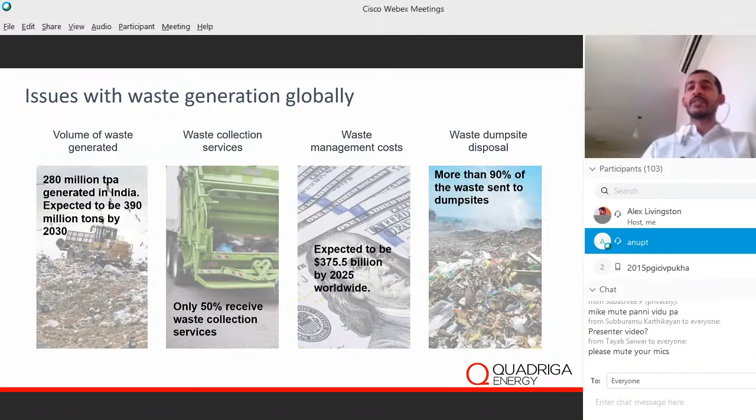My friends asked me, what is the difference between a dump site and a landfill? That's when I realized that you need to also educate the public on what is the difference between a dump site and a landfill, and why it's different.

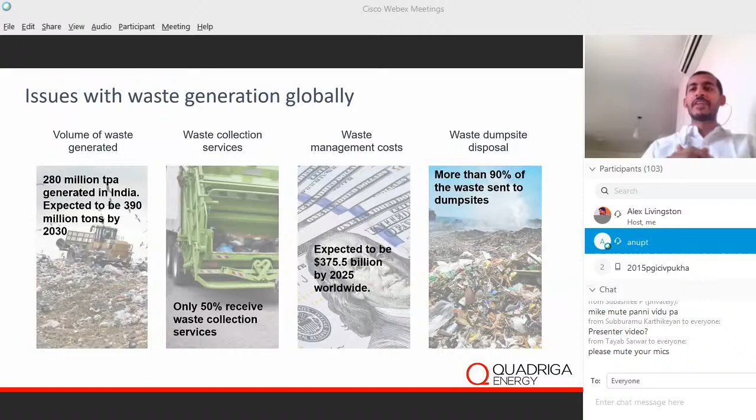It's limited land space, with no trees. Because the space is limited, the whole point of putting it on fire is to utilize the space for more waste, and this has resulted in extreme levels of toxic gases.

People in the nearby neighborhood have been affected, and also these kinds of practices lead to contamination of the groundwater.

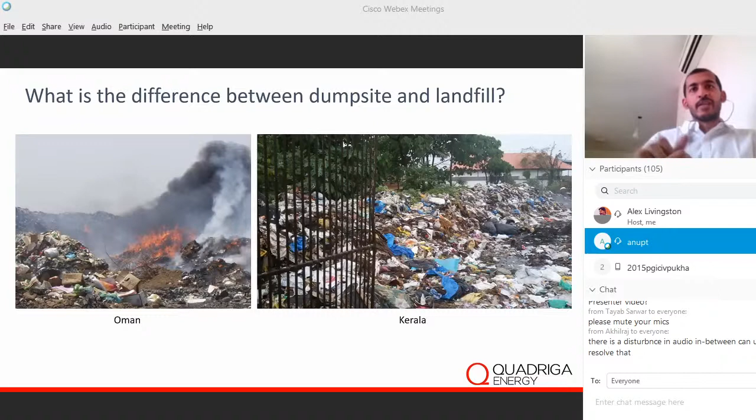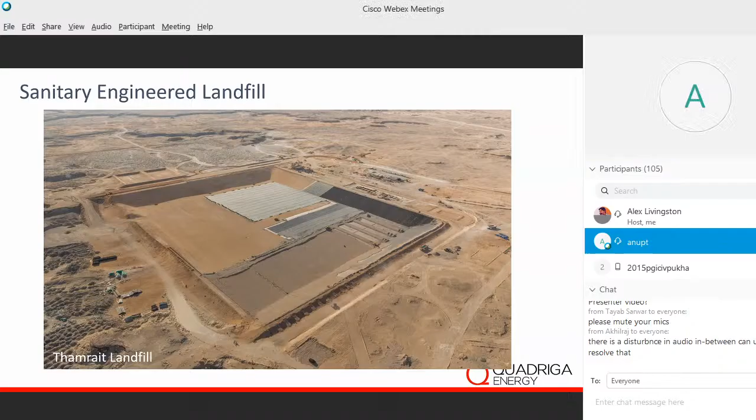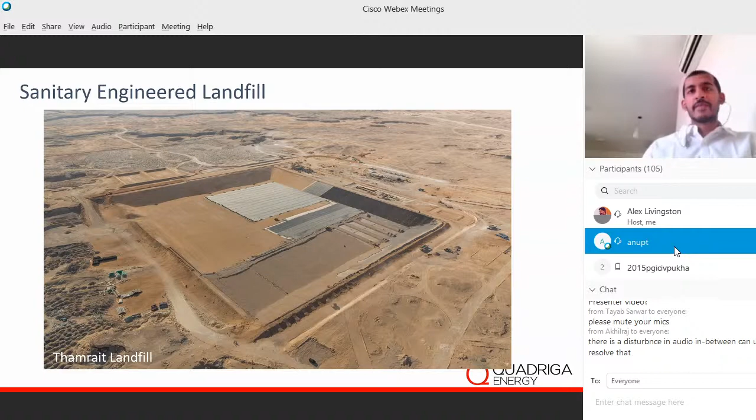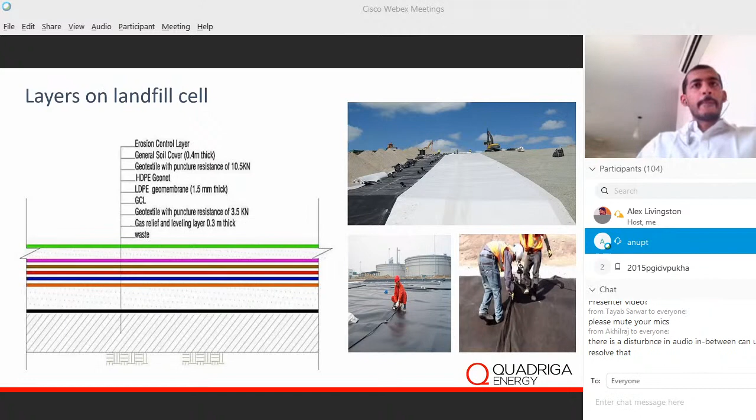So like I mentioned earlier, the landfill gas is majority methane. Methane, as you might know, is a greenhouse gas, and it's 25 times more potent than carbon dioxide. So right now we are discussing climate change and controlling greenhouse gas emissions. So you need to flare it to prevent the contribution of your country towards greenhouse gas reduction potential and commitments. That's one of the reasons why we install these flaring units.

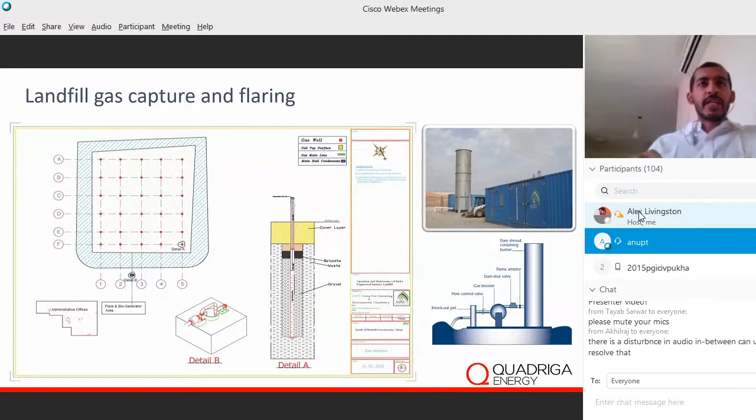So is flaring the only option? Not really. In certain countries, they also try to recover energy from these landfill gases.

But there are still other non-readily degradable waste, like wood or textiles. It disintegrates, but not as fast as food waste. So that starts degrading, and the landfill gas tends to drop with time. So after 40, 50 years, there's no more gas generated from this particular landfill.

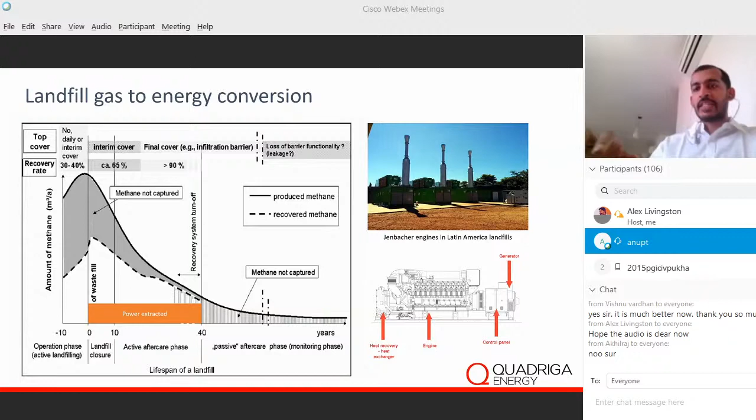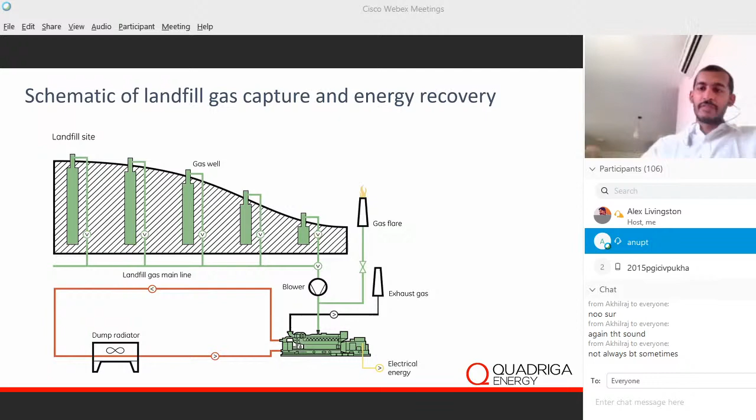So sounds like landfill is a good solution, right? Why can't we all go for it? Not really. Landfill is a long-term liability.

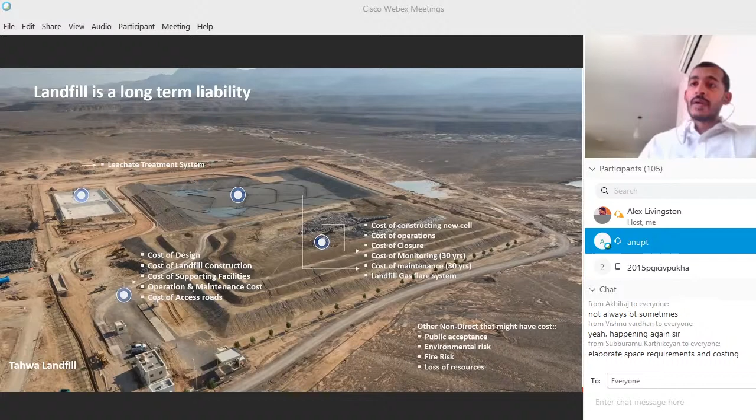And then loss of resources. When you landfill something, you are saying goodbye to that resource. You cannot recover it. So the whole point of us being resource efficient, landfilling is not an option to explore. It is an option to have as a contingency, but that should not be the solution.

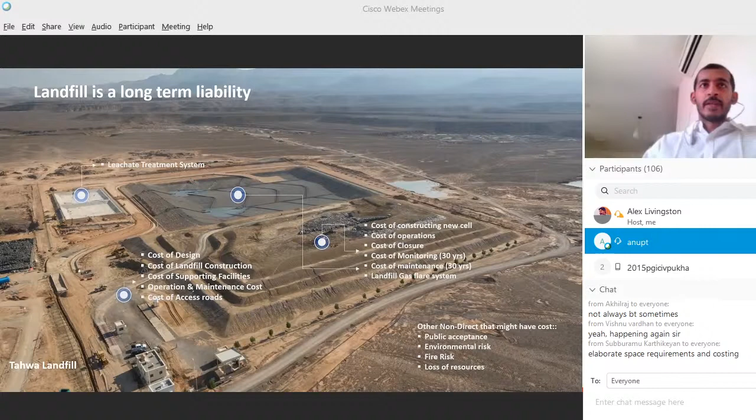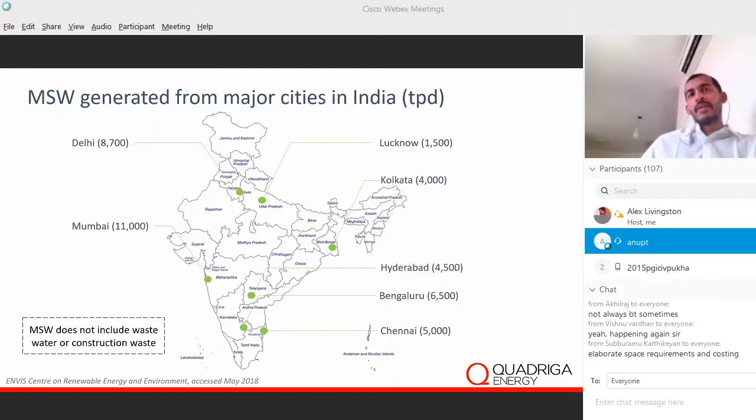All right, so once you understand the volume, what is in this waste? There was a report published by World Bank back in 2012. It's updated again, there's a new version that came out in 2018. It's called 'What a Waste'. It compares the waste composition for different income levels in different types of countries. They did an extensive study, went around all continents, and found out that countries with low or middle income tend to generate more organic waste, whereas countries with very high income tend to generate less organic waste and more recyclable waste. So what is meant by recyclable waste? It's paper, plastic, glass, more packaging waste.

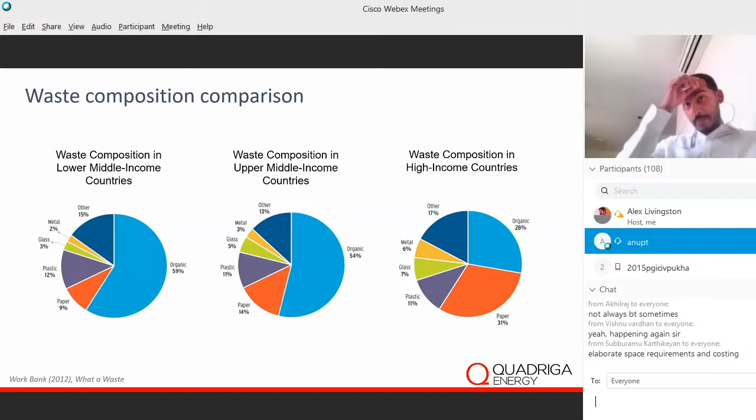This particular scenario says that what I'm trying to get at here is you need to understand your market for developing a solution, so you understand what is the composition.

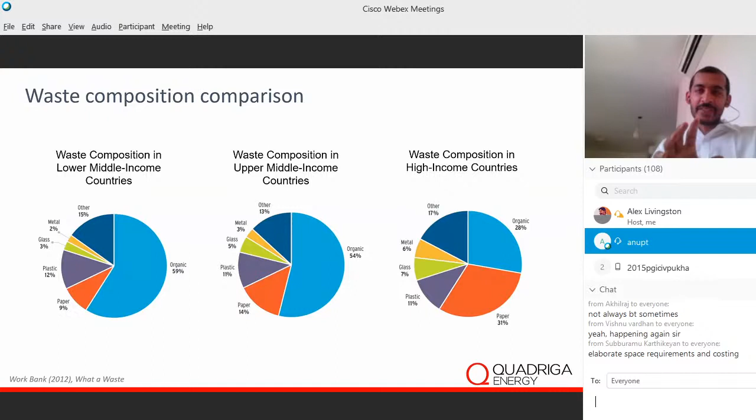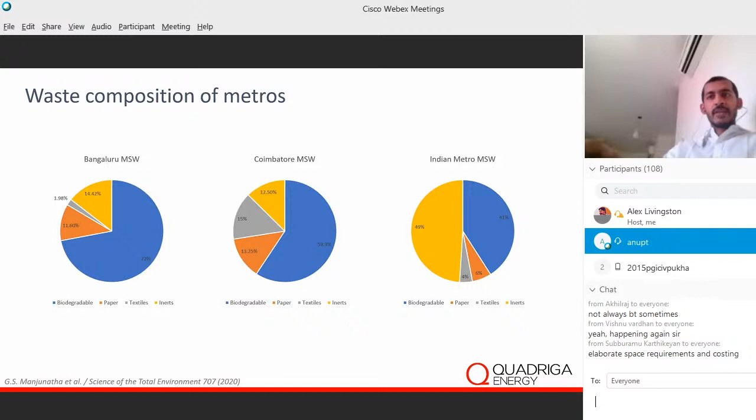So that's for metros, municipalities or corporations. What about panchayats? As you know, in India we have panchayats, we have municipalities, we have corporations. It's all different because the income level is also different across the municipality, the panchayat, and the metros.

I happened to be part of a team that did a study back in 2016 across four panchayats in Kerala. The result again shows that at panchayat level, more than 65% of the waste is organic in nature. It was also helpful for us to understand how much is the recyclable fraction.

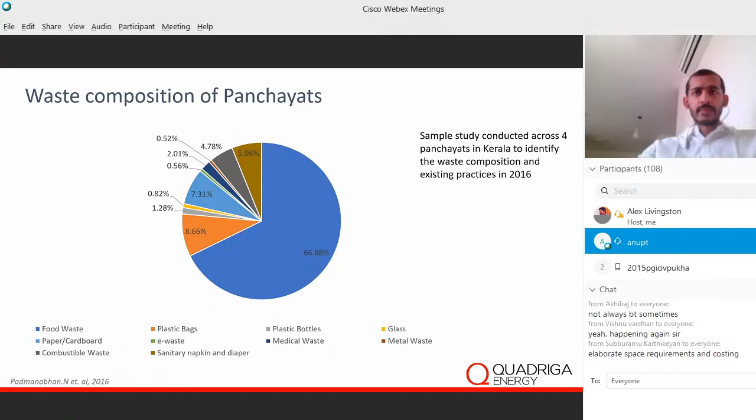Excuse me one second. Right.

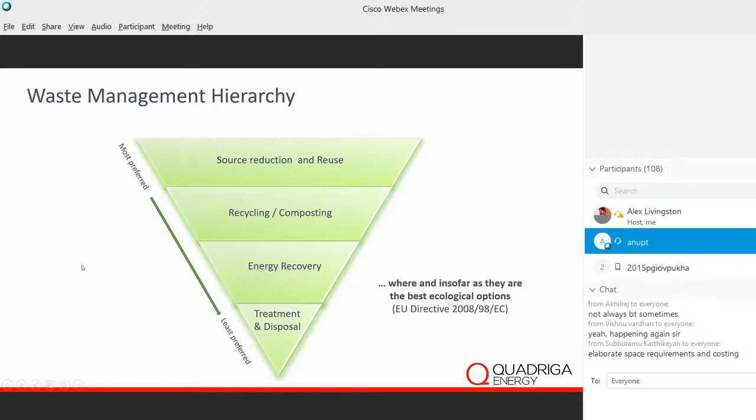So, best method of handling or treating the waste. Some of you might have seen this particular hierarchy. The best option is... okay, so the best method is... I'm really sorry, one second, I'm just getting some disturbance. The best method is not to have the waste in the first place.

The least preferred option is landfilling the waste. You can see there's recycling, there's energy recovery. So there's a lot of options that you can utilize to handle the waste generated.

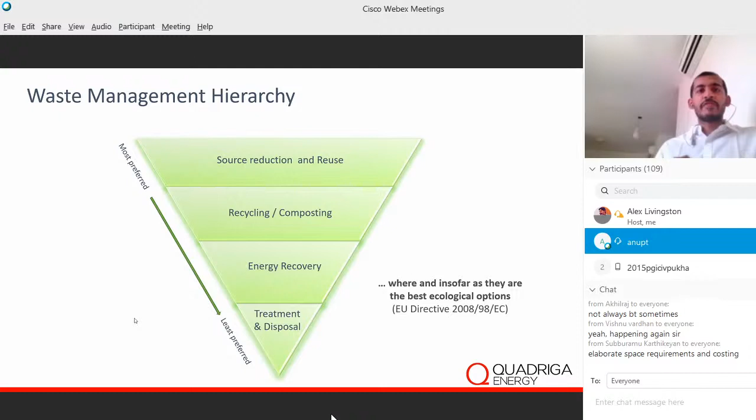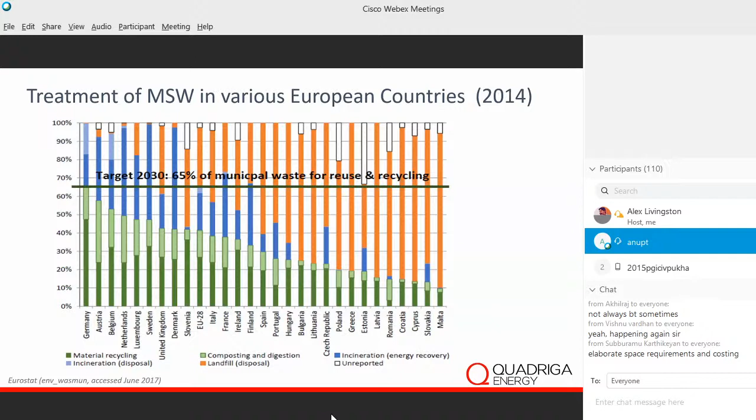But regardless, they have set a target that by 2030, at least 65% of the municipal waste should be reused and recycled. It's 10 years down the line, but still you can see some countries are almost there or making progress in achieving this particular target.

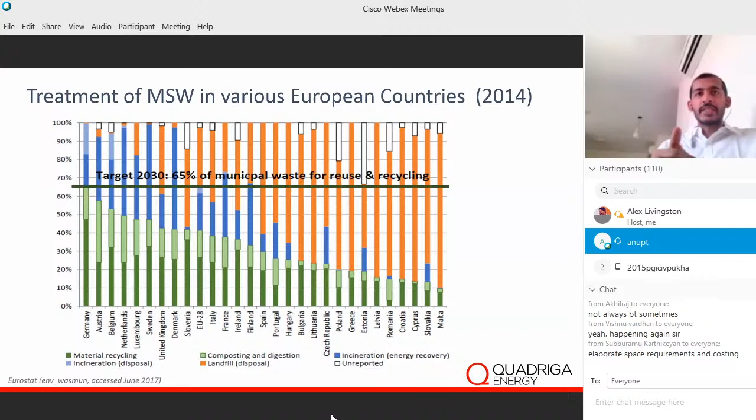So what are the drivers for waste diversion? We talked a lot about waste diversion. Why should the country do this? Mostly it's regulation, regulatory requirement, and the European Union has set a landfill ban, or at least a landfill target to reduce landfilling to up to 10% of municipal waste by 2035.

There's a landfill tax on top of it, where if you send the waste to a landfill, you have to pay a tax to the government. India is also making positive progress towards something similar.

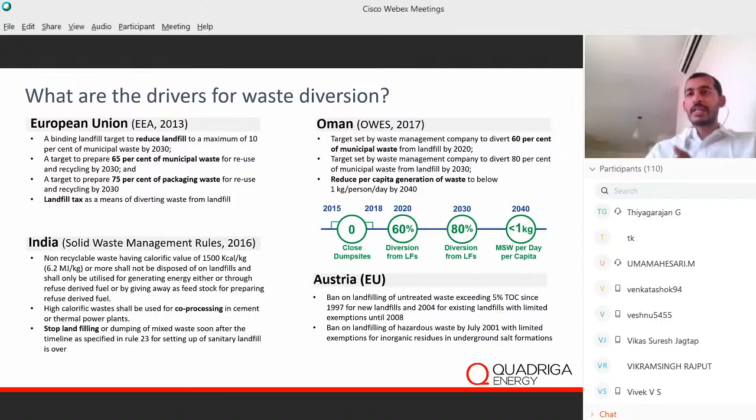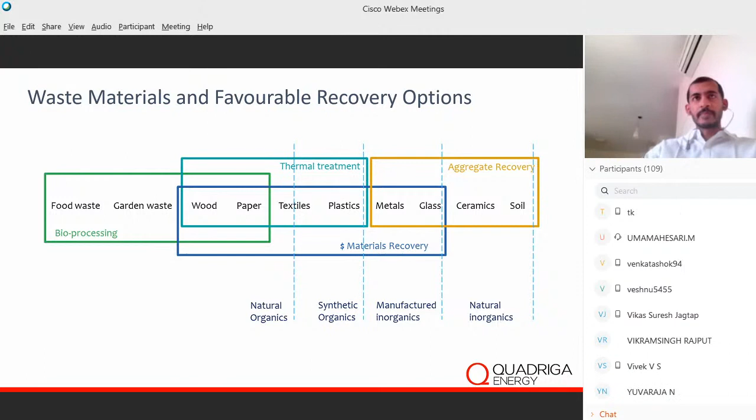So when it comes to economic recovery, disposal is the least preferred option. But what is the truth? The best option for the government, from government's perspective - because I'm working in the government sector, so I understand what costs money and what requires subsidy and what actually can make money.

So reuse is the best option. If you can reuse the waste, then that's the best option for the government. You don't have any investment, so it has the highest positive value because you're not producing any waste. You don't need to collect that waste in the first place. The government doesn't have any cost associated with it.

The second option is source segregation. You might know about multiple bins, and even in Kerala there's a concept of Kudumbashree coming over to your house to source segregate certain types of waste. If you source segregate the waste, the option of recycling it is much higher. There's not much cost associated with it because as soon as you collect the waste separately, you bring it to one depot, source it together, and then transfer it to the recycler. There's not much investment needed in that particular value chain.

If you go to sorting, which is where you mix the waste together, once you mix all the waste together, then there's a cost - you need to sort it. There should be a line of people sitting or standing and sorting the waste into different fractions. Then you need to clean it, then decontaminate it. So that costs money to run such a plant. You need to meet environmental norms, health and safety aspects for the people who work in such a plant, fire safety associated with storage. All that comes into play, so it costs you money.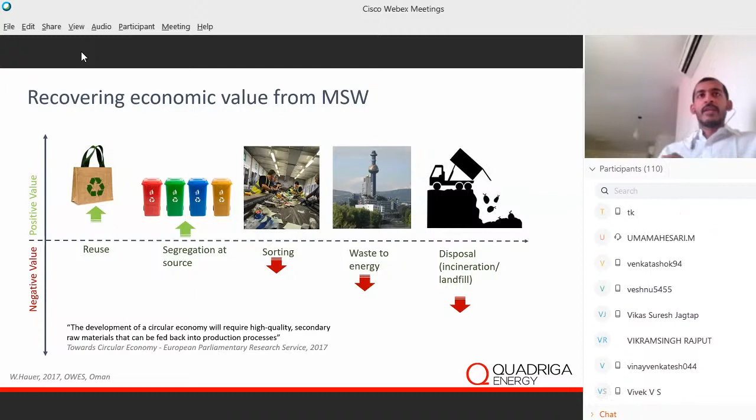So what is the option? What's the solution? The solution is not a straightforward one. It's an integrated solution that you need. I cannot say I need waste to energy and don't need source segregation. I cannot say I need source segregation and recycling but don't need waste to energy. You need an integrated solution.

So obviously the priority is prevention of waste. Second is source segregation - once you segregate, you can rely on mechanical, biological, thermal, and other treatment options that are available. Third is energy recovery. And finally, the byproducts or rejects from the system can be landfilled.

The system needs to depend on the first and second law of thermodynamics. The first law is that energy needs to be balanced. The second, in a funny way, means you cannot unscramble an egg - once it's scrambled, it's scrambled. Also, once you develop a solution, you need to look at the economic decisions, like the long-term cost. If you rely on landfill or dump sites, that's the least cost option.

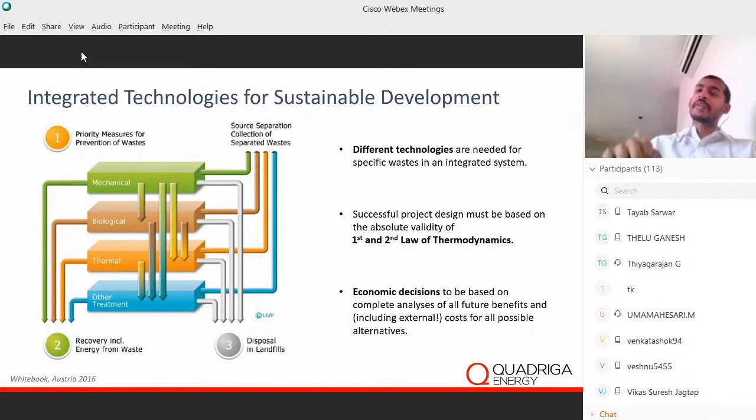There's no cost associated with it. But does it capture the full cost? No, it does not. It does not cover the cost of contaminating groundwater or soil, and it does not account for the cost of causing health damages. So once you account for all the costs, you start looking at a different picture. It's not purely what's the cost right now, it's what's the cost over a period of 20, 25 years.

So let me go into the details of bioprocessing. I've been talking about bioprocessing for some time, so I'll give you an overview of what is meant by it. There are two types of bioprocessing, one very common: anaerobic biodigestion, or digestion, and aerobic digestion.

Anaerobic digestion is when food or other biodegradable waste is treated by microorganisms in the absence of air. Once treated, it generates biogas, which is rich in methane. As you know, methane is a combustible gas. You can combust it using a gas engine, and recover heat and electricity from it. The digestate can be stabilized, dewatered, and sent out as organic compost.

The different stages of biodigestion you can see on the left hand corner: hydrolysis, acidogenesis, acetogenesis, and methanogenesis. Most biogas plants have these four phases, but the order and time of each will differ depending on the technology and system that you use.

Then there is aerobic digestion, which is composting. Unlike the other process, this happens in the presence of oxygen or air. The microorganisms feed on the food and develop soil amendments, which you can again use on the farm to produce food. So it's a circular concept.

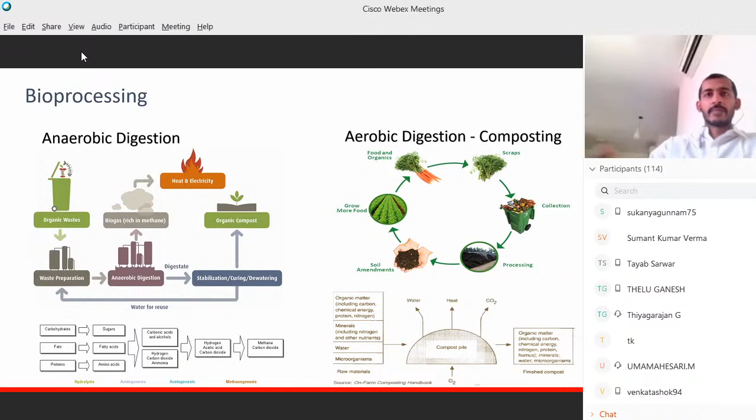This is an example of what a biogas plant looks like. This is something we are developing here in Oman, taking waste from the food and vegetable market and also from a slaughterhouse. We take the waste from these two markets and send it to the biogas plant, which will produce enough electricity. It's co-located next to Sultan Qaboos University, so the waste will generate enough electricity for powering part of the university's requirements.

The university also has a co-located farm and farming community, so they're going to use the digestate there.

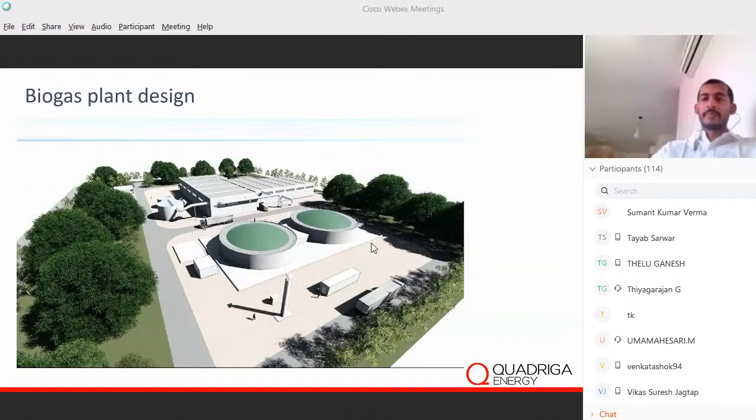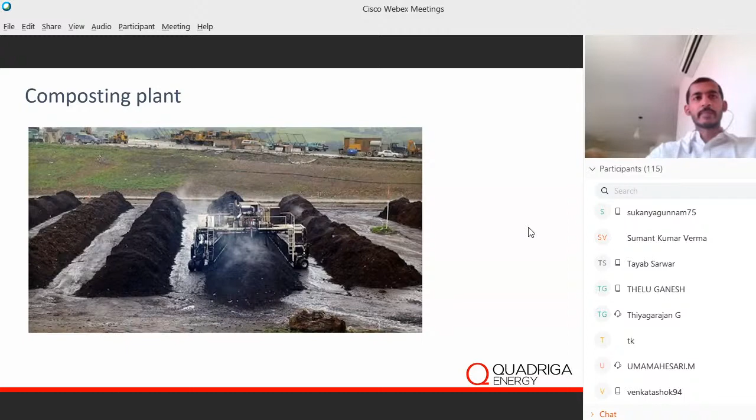Now moving on to thermal treatment. So what is included in thermal treatment? Waste is sent through a thermal treatment process and burned, and the result of burning is you get flue gases, different types of gas, and bottom ash. You also recover from this process useful energy, which you can use for producing steam or for producing electricity.

It's very important to understand the waste composition and its characteristics when you look at the raw material. For example, if the waste is fully organic, fully food waste, there is no point in burning it, because the calorific value of the waste is influenced by its individual components. So when you want to burn waste, the first thing you look for is the calorific value of the waste as a whole, not the individual components. That's why the composition of the waste is very important.

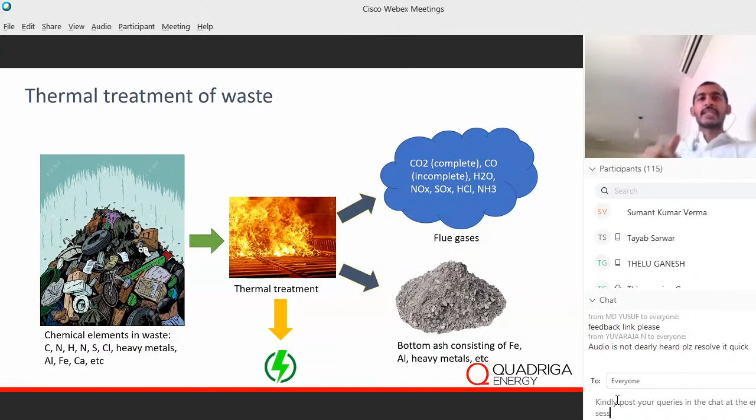Food waste has very low calorific value, so it makes no sense to burn food waste. This goes back to our initial discussion that we need to do source segregation, diverting food waste away from that option. But wood waste, paper, textiles, and plastic tend to have high calorific value. So the higher the percentage of these components in the MSW fraction, the higher the calorific value of the waste, and the more energy you can recover.

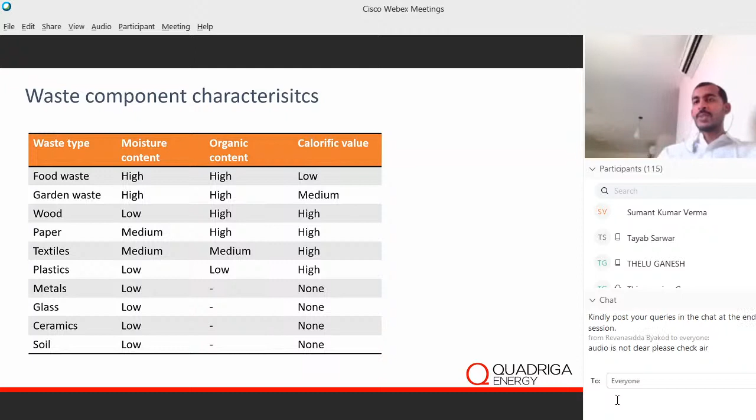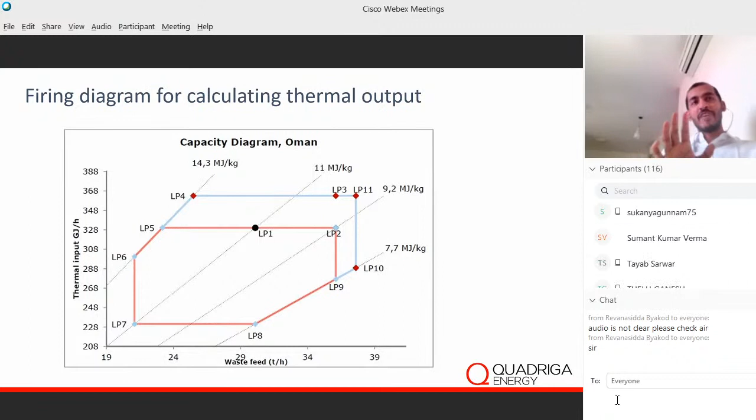So this is a firing diagram. For an engineer developing a waste energy plant, this is very important—it helps you decide the size of the plant based on the calorific value and the energy demand. For example, the government-run electricity grid requires, say, 65 megawatt of additional capacity. Once that is fixed, what you tend to do is work backwards.

So you test, okay, what is the calorific value? The slope lines are the calorific value of the waste. If my calorific value is say 9.2 megajoules per kilogram, which is quite high—but in the Middle East we tend to see more 9.2 and 11 megajoules, while in India it's mostly 7.7 or below because of the moisture content. But anyway, I'll take the example of Middle East: 9.2 megajoules per kilogram.

So now you know the energy, the thermal input, because that's kind of fixed. So what you tend to do is, if the calorific value for the waste is 9.2, how much should be the waste throughput? For example, taking 328 gigajoules per hour, for that particular waste you need to be feeding approximately 36 tons per hour. So this explains the capacity planning of the plant based on the calorific value and the energy demand—all three are interlinked.

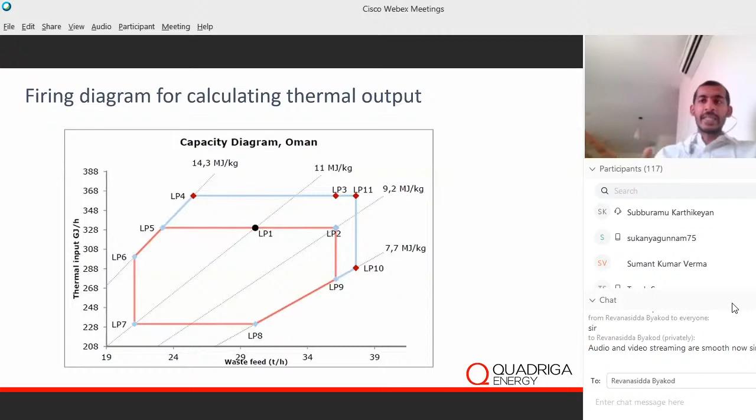So that's a ski slope. They designed a ski slope around the waste energy plant so that the residents of the country, during winter time, can do skiing and have fun next to the waste energy plant. That also tells you how safe the plant is—if they're inviting the public to come and ski next to it, that tells you the plant is designed according to the highest safety standards.

Then there are around 75 units in the US. In Japan, there are around 1,000 units installed already—the reason is the space constraint, since Japan cannot afford to have landfills, so they have more waste to energy plants. China and South Korea have around 120, but it's growing very fast. In India currently we only have 7 installations, but more plants are being studied for development.

Middle East—there is an operating plant in Qatar. Sharjah and Kuwait are right now tendering a plant for construction. In Oman, like I said earlier, we finished the feasibility study and the detailed analysis of 2 plants, now waiting for tender, but because of COVID the tender got postponed to next year.

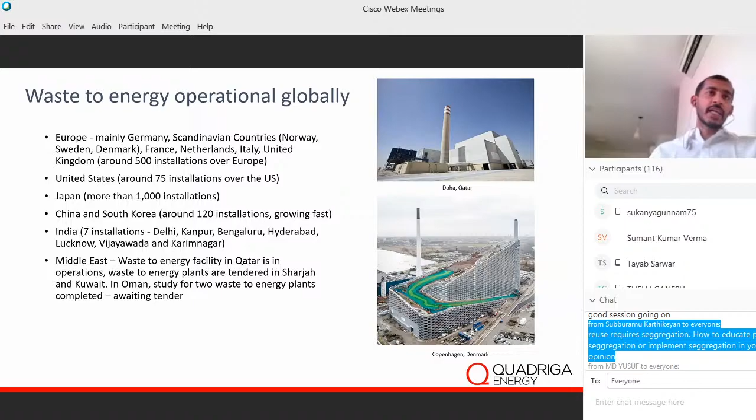But if your municipal solid waste is not pre-treated, the best option is to go with grate. That's why you will see the majority market share across the globe is for grate incineration technology, because in most places they don't do pre-treatment of the waste.

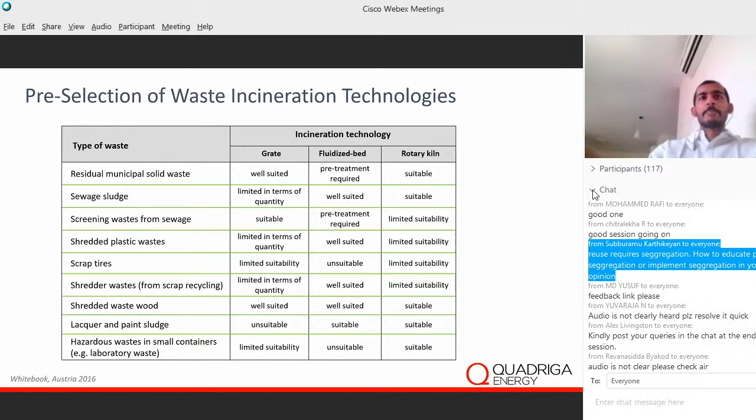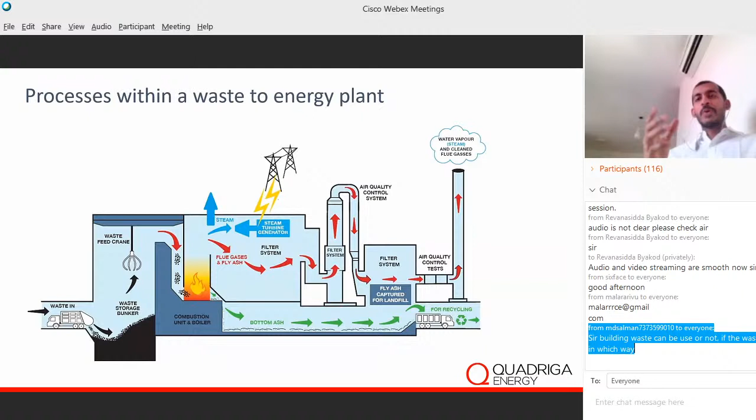The gas that results from the incineration of the waste is treated—it's sent through a filtration system, a proper air quality treatment system, and then it goes through a chimney. The bottom ash from incineration of the waste is collected and sent for recycling or for disposal.

Usually it's also done as a contingency—it's not just-in-time delivery like the Kaizen or Japanese Kaizen philosophy, because there can be natural disasters, or something happens, the truck breaks down. So you cannot have the plant idle for that period of time.

So what you tend to do is you have the bunker capacity for at least 7 days. This is the minimum usually. So it's designed to have an excess capacity of 7 days worth of waste or fuel.

Now we're going to the fuel concept. You need to have sufficient extra capacity. In the event of any disaster, you can rely on the excess from the bunker. Another purpose of having the bunker is if something happens, like suddenly you have 5 trucks coming full of, say,

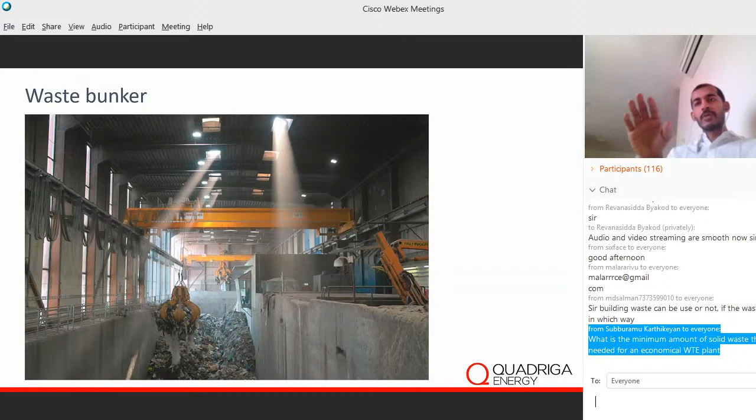paper waste or food waste, for example. So what tends to happen is you cannot feed it directly onto the hopper because, as I mentioned earlier, each waste component has different characteristics. So you need to homogenize the waste before you feed it into the hopper because, like I said, the thermal output depends on the calorific value of the waste and the quantity that you need. So another purpose of having such a bunker is to mix the waste and homogenize it before you load it into the hopper.

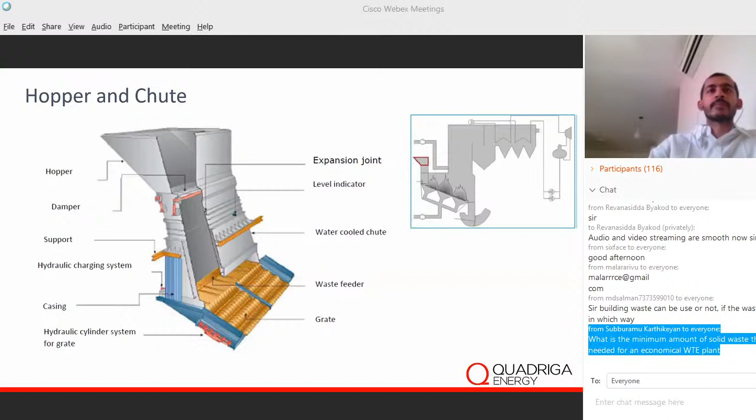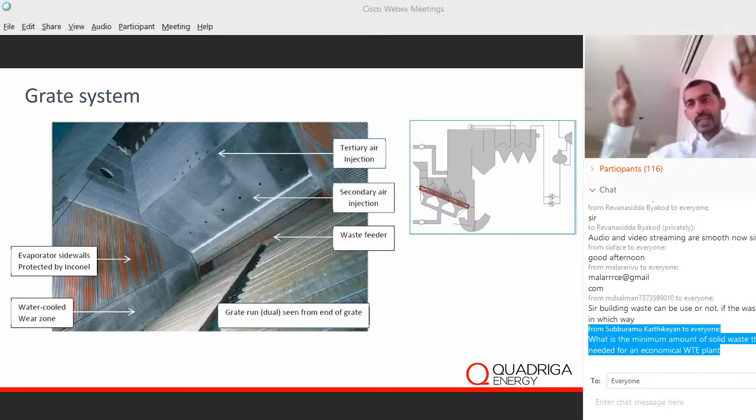So air is very important because if you don't provide sufficient air in the grate, the waste does not burn. So by the time it reaches the bottom, it's not ash, it's actually the waste itself. That's why there are different types of air feeding happening - secondary air injection, tertiary air injection, and the side walls of the grate are also cooled because you don't want it to reach very high temperatures and start clogging the system. So it is a very sophisticated process.

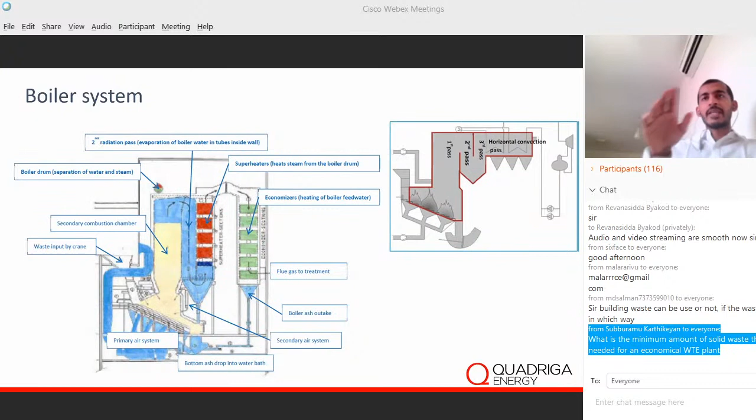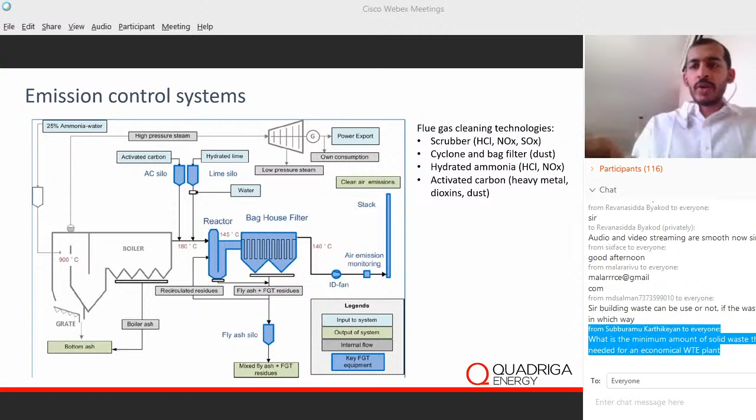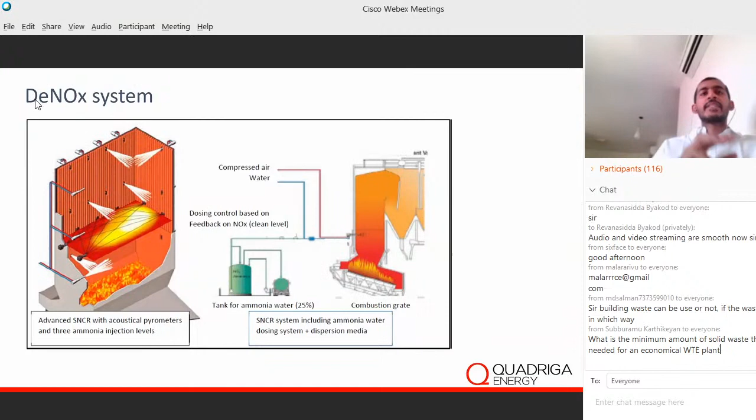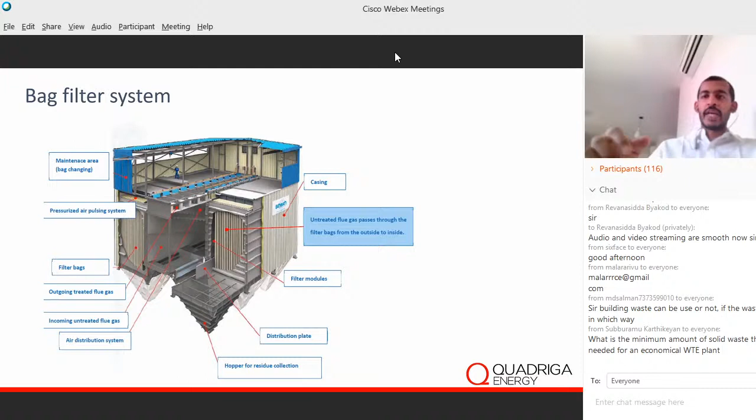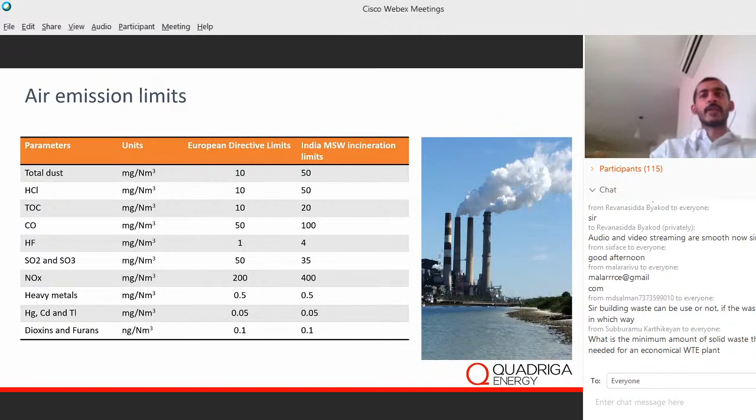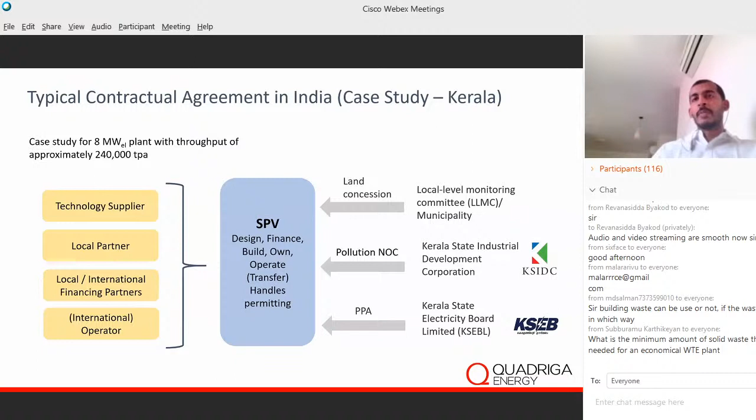The government commits from their side: they give land free of charge for the period of concession, they give a pollution no objection certificate, and the KSEB, the local electricity board and grid operator, signs a power purchase agreement for the duration of the contract. They negotiate the price per unit of electricity. Usually there's also a scenario where the plant gets paid from accepting waste as fuel, so for every ton of waste received, they expect a certain payment per ton. But in the Kerala case study, they didn't have that scenario. It was all from the power purchase agreement with the KSEB.

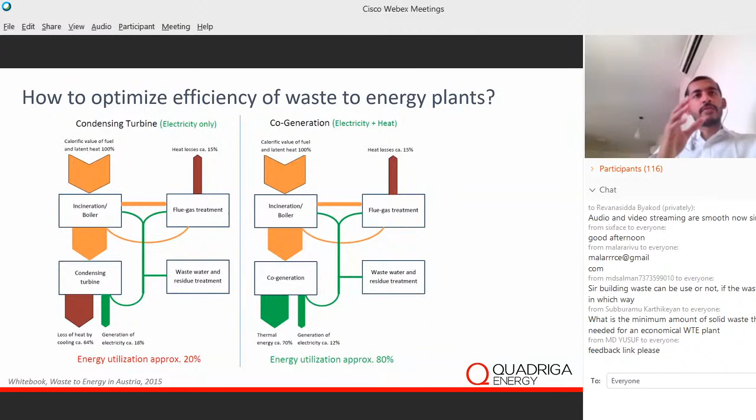So is this an efficient system? You might ask me, and I'd say I have my apprehensions, because recovering electricity only is not the most efficient plan. I did a comparison of two scenarios: one with only electricity, and one with cogeneration, which means electricity and heat, where heat can be steam or hot water. For a plant producing only electricity, the maximum efficiency is around 20% because it uses a condensing turbine, where a lot of heat is lost to the environment. The priority there is producing electricity, so those plants tend to be less efficient. But with cogeneration, the electricity output reduces because some heat is sacrificed for thermal applications. When you add the thermal and electricity efficiencies together, the total energy output is around 80%, making the plant far more efficient than electricity-only operation.

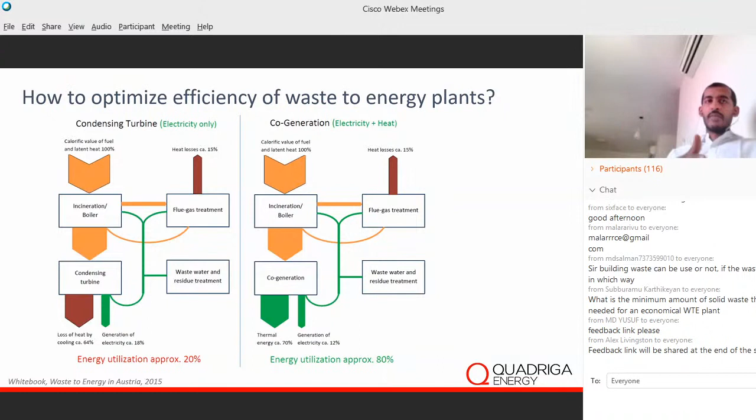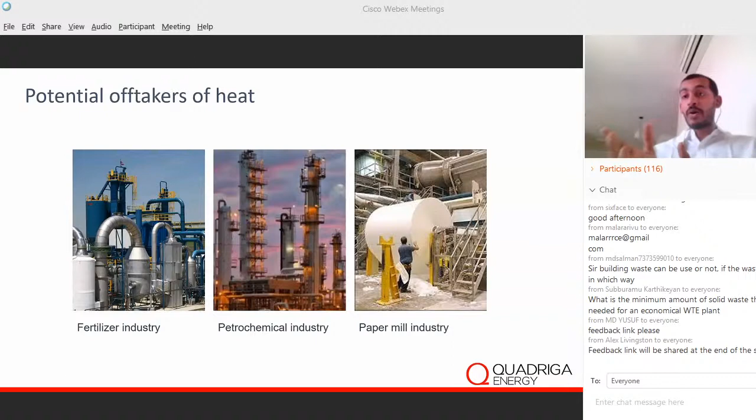So what can you do with this heat? When I presented in South Africa, someone asked this exact question: we keep talking about heat and steam, but where can it be used? There are industries that require a lot of steam, such as fertilizer industries, petrochemical industries, and paper mills. There are plenty of industries in India that require significant steam or heat, so it depends on how you co-locate your plant next to such an industry.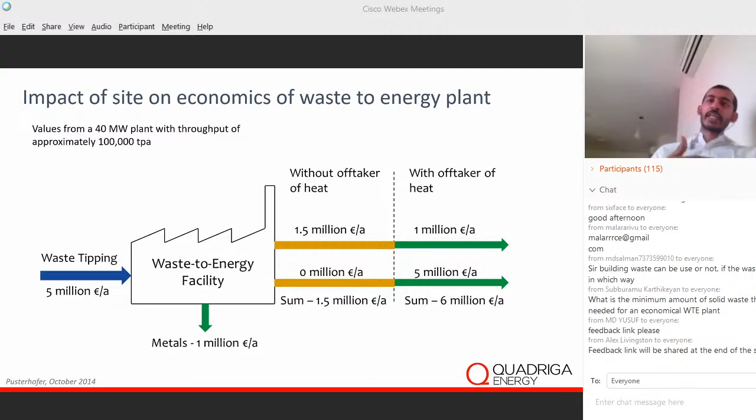So without an off-taker of heat, the plant produces more electricity, which sells to the grid. The annual income is only 1.5 million euro per annum. But if the plant was able to sell heat to the local industry - why should they pay for the steam? Because they save on the gas or other fossil fuel they'd burn for producing steam, so they pay for the steam. You can see the annual income for that plant becomes 6 million instead of 1.5 million. So that's how it impacts not just the efficiency but also the income of the plant.

So is it done anywhere? I mean, it keeps talking about examples.

So I happened to visit such a plant in Austria, in Lenzing. This plant is co-located next to an industry that generates rayon, a textile industry. It's a kind of textile used as a replacement for cotton.

So in that plant, it is not just co-located for the steam purpose. There are three purposes for co-locating the plant. One is obviously the steam that they generate, which can be fed into the textile manufacturing unit.

Second, the textile manufacturing unit produces a lot of hydrogen sulfide gas, which traditionally needed to be sent to the environment through the stack. Now they feed that gas back into the furnace process and thermally treat it in the waste energy plant, so they don't have an issue with hydrogen sulfide. It gets converted to sulfur dioxide, which is captured using the scrubber system I explained earlier.

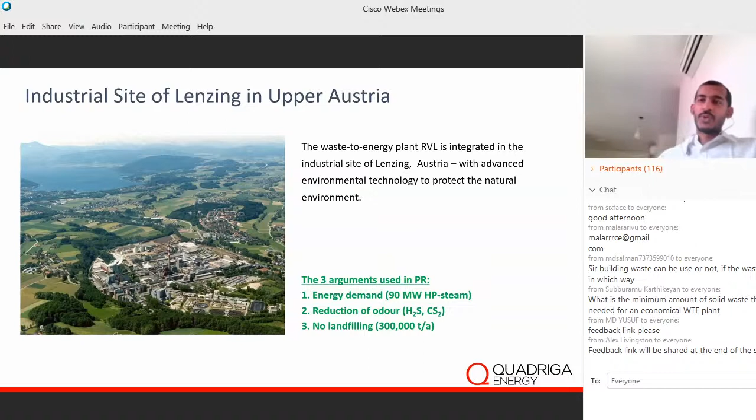And third is landfilling. The industry generates certain types of industrial waste, which is fed into the waste energy plant, so they recover energy from the industrial waste.

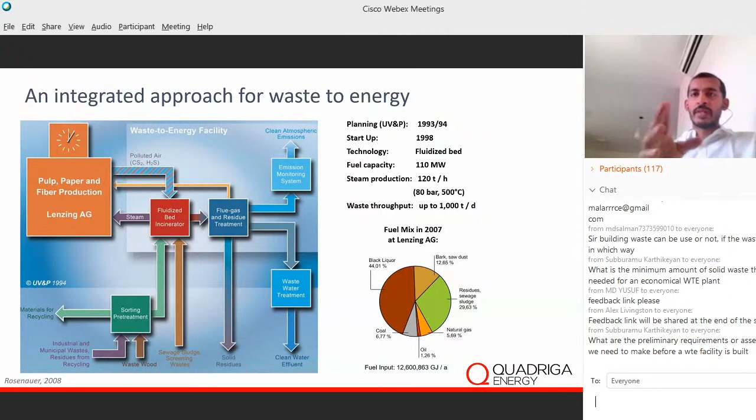This plant has been operating since 1998, and they treat around 1,000 tons of waste per day. This is a mix in the pie chart - you can see the different types of waste they use for incineration in this particular plant.

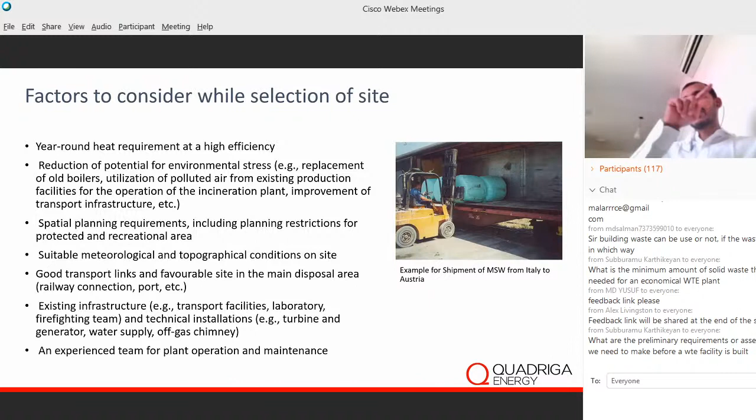So what are the factors you need to consider while selecting the site? Obviously, you need a year-round heat requirement. Then, like in the case of Lenzing, if it's possible to reduce environmental stress - like if there's a pollutant being emitted, such as sulfur dioxide or hydrogen sulfide, you can channel it into such a plant, thereby reducing overall environmental stress from such a plant.

Spatial planning is very important. You need to see if you can co-locate it if the plant is located in any recreational or protected area. As much as possible, try to locate the plant away from such protected zones.

Then the meteorological and topographical conditions are very important when you select the site. Good transport links are also important. On the right hand side you can see a picture of a bale, which is a plastic covering for waste - usually it's done for hay. In Europe, they generate this hay, and even in North India it's used for animal feed. So instead of hay, right now we're looking at waste.

They coat the waste, cover the waste using this particular bale. They bale it, load it, and ship it from Italy to Austria for treatment in a waste energy plant. So if you have good links, the waste energy plant can be co-located, and in the long term you can strategically source waste from different locations.

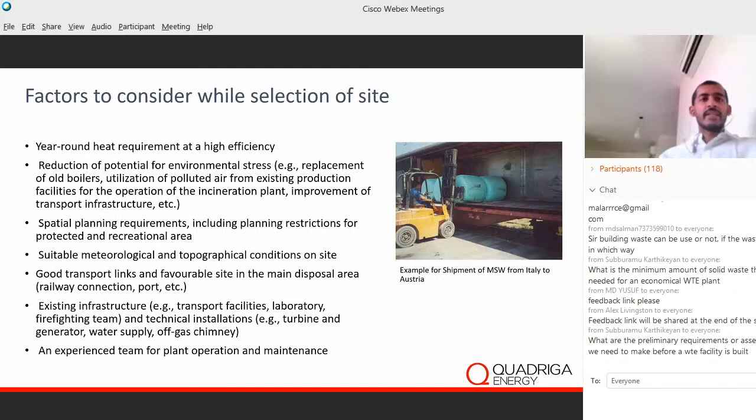Then existing infrastructure - like transportation, laboratory, firefighting systems - and technical installations. If there's already industry that has a turbine or generator installed, that's the best option. And then you need an experienced team for the operation and maintenance of such a plant.

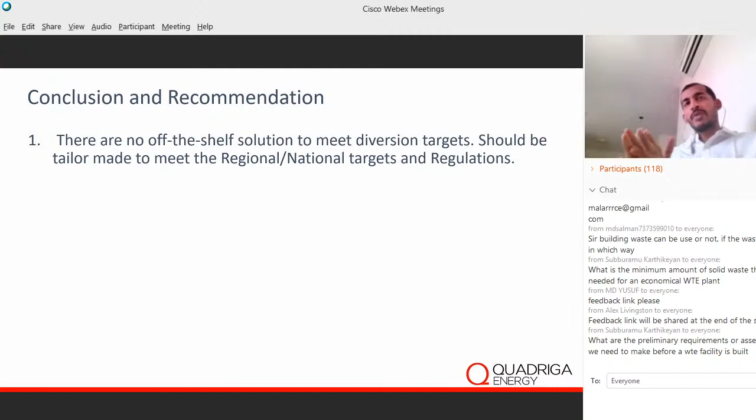Coming to the conclusion of my presentation: there is no off-the-shelf solution for diverting the waste - you cannot just copy and paste. You need to develop an integrated solution that's best fit for your regional, national targets and regulations. You should always look for a solution that has the least ecological impact. Always look at the waste hierarchy with emphasis on waste segregation at source and reuse of material. From the economic perspective and the treatment perspective, you should always prefer segregation and reuse.

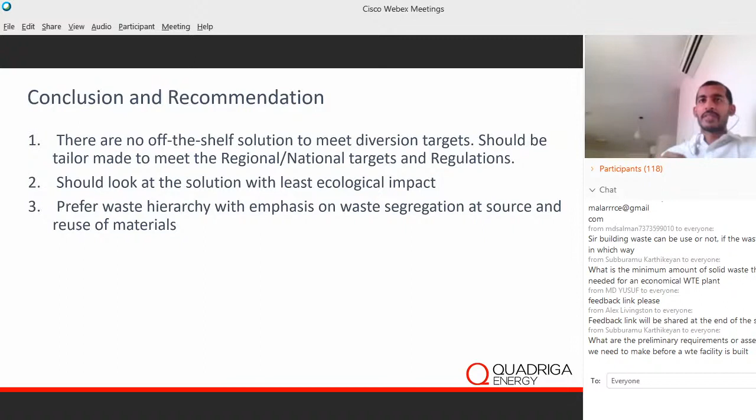Select an appropriate site by studying the local industries, whether they have an energy demand or upcoming energy demand. For example, if one of the steam boilers is nearing the end of its life and needs to be replaced, can you co-locate a waste energy plant next to that industry? They can use the energy from this plant, and this results in higher efficiency and also revenue.

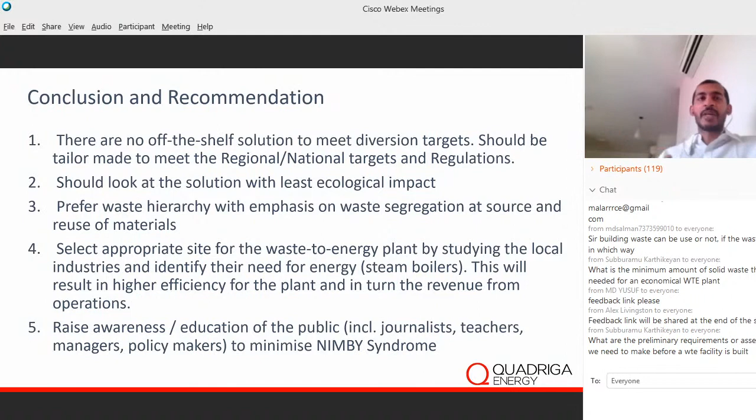You always need to raise awareness and education for teachers, managers, and policymakers when it comes to waste-to-energy, to reduce the NIMBY syndrome. NIMBY means 'not in my backyard' - it's a commonly used term in the waste management sector. People want good, state-of-the-art solutions, but not in their own backyard - somewhere far away from their house or neighborhood. Unless you are educated, you tend to be skeptical about any waste-to-energy solution, so it's needed to raise awareness for accepting the solution.

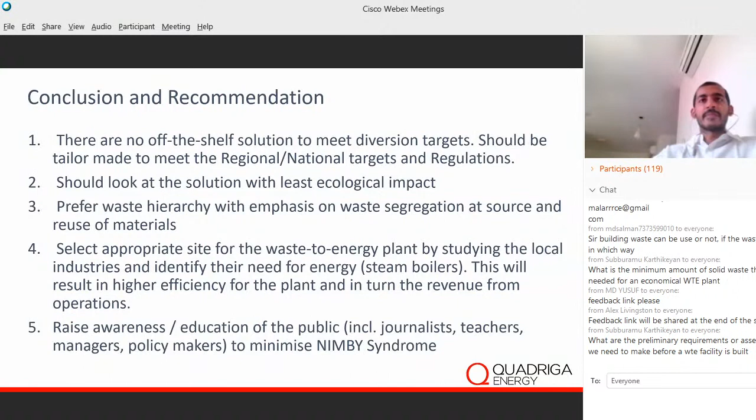Thank you so much for listening to my presentation. I hand over the presentation to the chairman.

Hello? Hello, Alex? Hello, Alex? Jobina? Hello, thank you sir, so can you conclude if you don't mind? Yes, sir. Just a minute. Yes, I can. Okay. Okay.